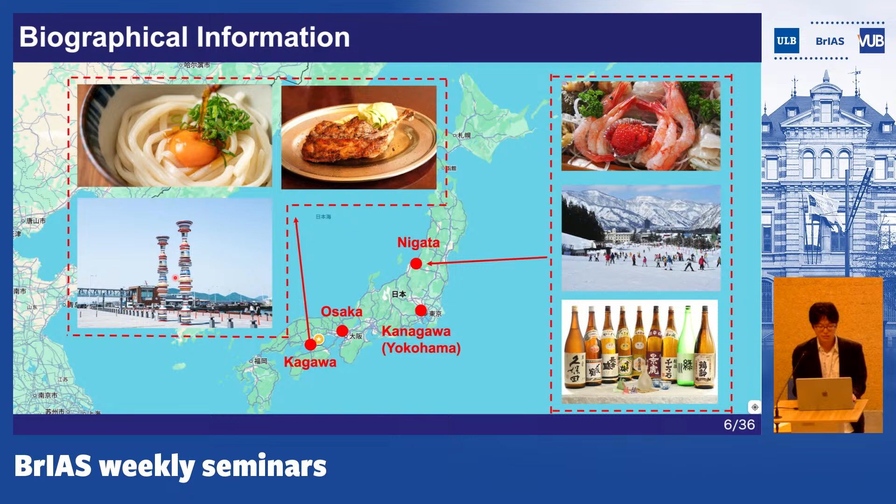Okay. Next, I'll talk about the research. First, the research motivation and research interest: how can we understand and utilize the mechanism of tactile sense. We usually use tactile sense, for example, to touch objects or search the environment, and recognize the environment or object. However, we don't totally understand the mechanism of tactile sense. For example, how tactile afferents, which are nerves to sense tactile sense, contribute to it, or how skin contributes to the sense. So I want to reveal these questions and apply the findings to the development of better devices.

For example, better tactile sensors, or better soft robots, or better tactile devices for virtual reality. Okay, next, I'll talk about the history, why I got such motivation.

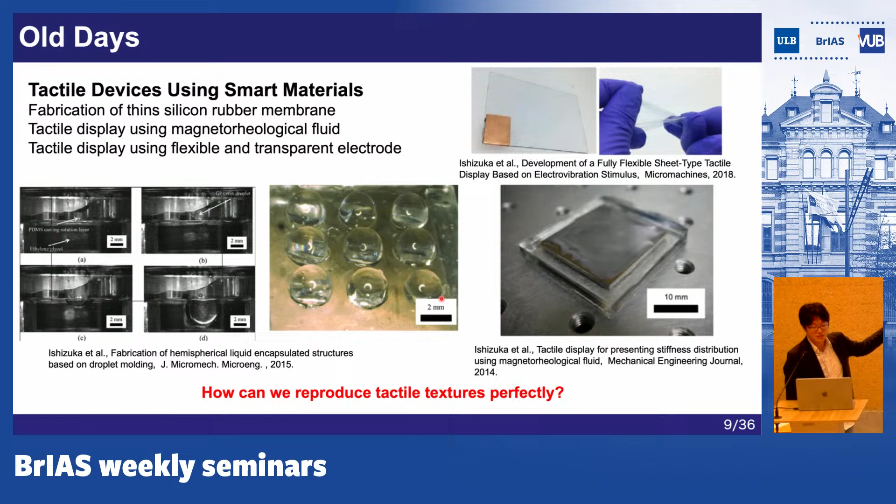Through these devices, I faced a problem. Even if I use these kinds of devices, it is impossible to reproduce tactile textures realistically, I mean, perfectly. To solve this problem, I found one way: the use of simulation. If we can simulate the activity of tactile afferents, it is possible to simulate how we feel texture, objects, force, or something.

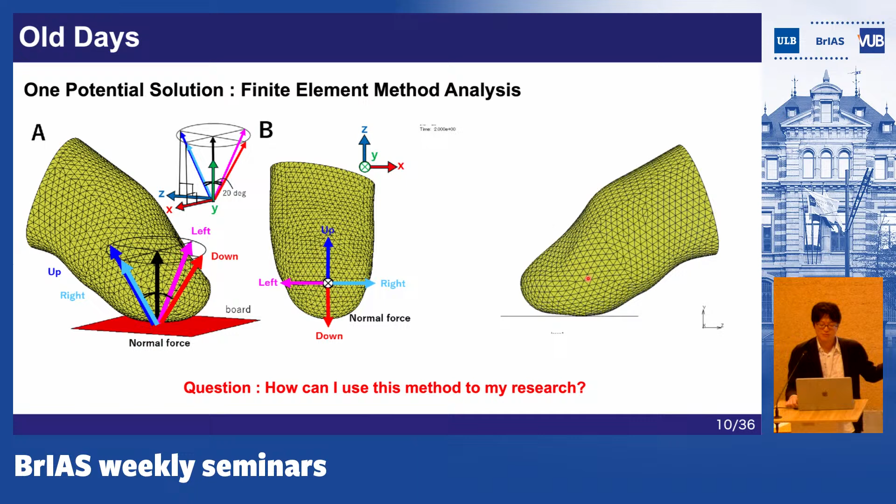This is an example of a simulation, called finite element method analysis. This method is famous; it divides the object into small elements and applies the deformation to the object. Then each element deforms, and as a result, we can get the entire deformation of the object. Then I faced another problem: how can I use this method in my research? I needed to find a way.

I considered a lot, and I found 3 ways. One way is, as I said, to use the simulation method to understand and simulate tactile sense on a computer. If I can get good findings from the simulation, it is possible to develop better devices using the findings or novel materials. Also, if I could prepare new devices, it is possible to develop applications such as virtual reality or remote operation.

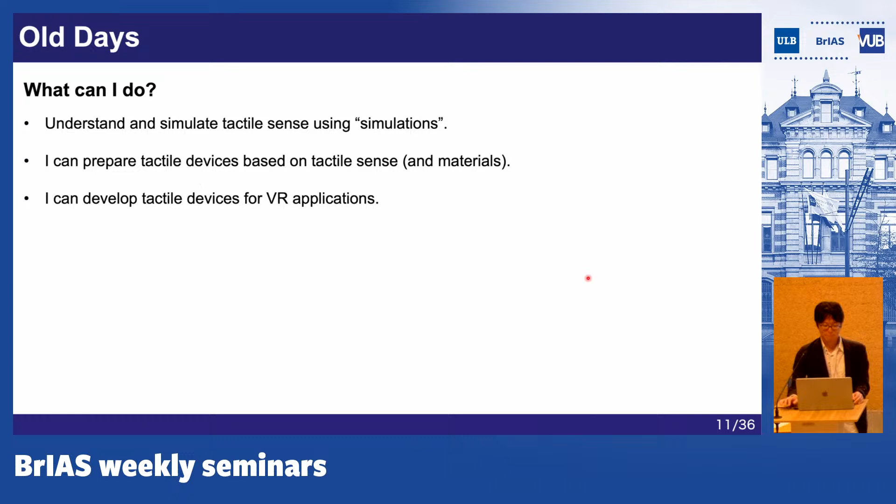From these 3 ways, I found one research direction: recording and presenting tactile sense. Recently, the metaverse, a kind of virtual reality technology, attracts interest from both researchers and industry, and it is said the market of the metaverse will be huge in the future. I believe the nature of the metaverse is presenting senses, such as tactile, visual, auditory, and so on. And I believe tactile sense is a powerful sense for virtual reality, because we touch objects to distinguish the object or environment, so we can feel reality through tactile sense.

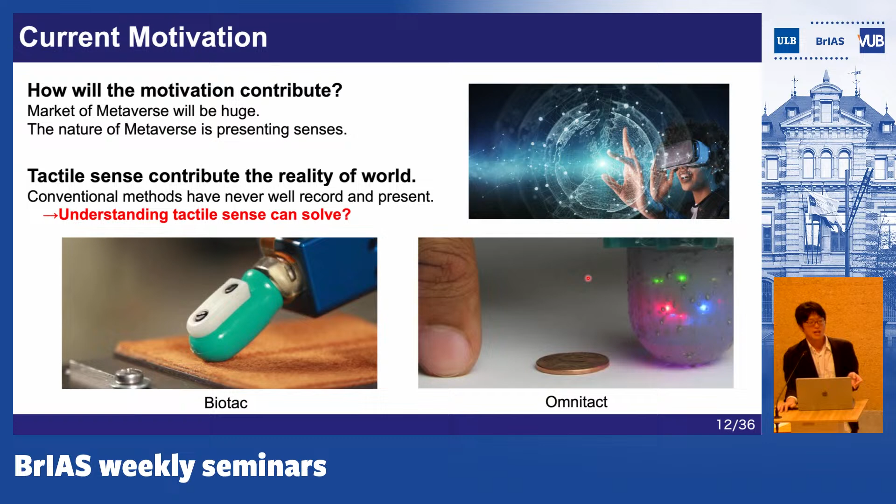But the problem is current devices cannot record or present tactile sense, as I said. And I thought that understanding and utilizing the tactile sense can solve this problem and will contribute to the development of better devices.

For this purpose, I conducted research on 3 topics. One is simulation and measurement. On this side, I simulate the skin and the tactile afferent nerves using a computer. To get a numerical model of the skin or nerve, I need to collect biological data, so I also conducted experiments. For example, I developed a haptic display that stimulates participants and gets brain data. And using these findings, I developed various sensors and actuators, for example, soft actuators or soft sensors.

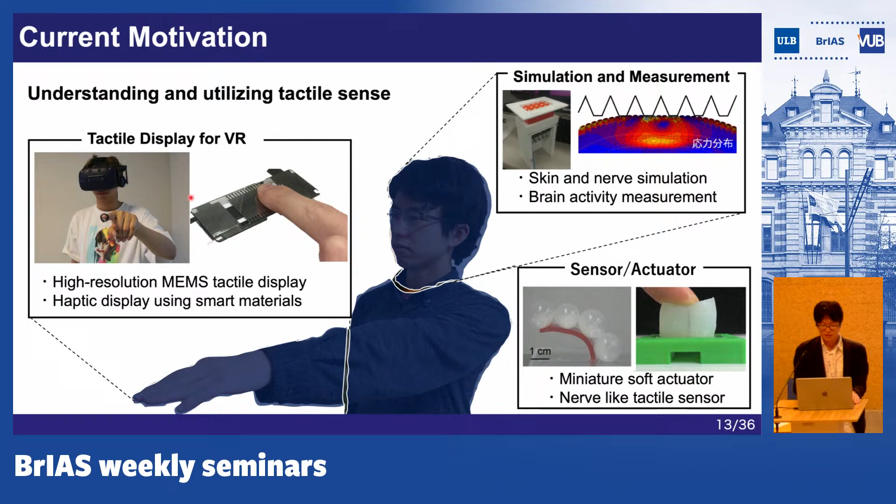Using findings of the simulation, the measurement, and the sensors and actuators, I also developed tactile displays for virtual reality or remote operation. For example, I developed a high-resolution tactile display using microfabrication technology, or a small force haptic device for virtual reality using low boiling point liquid. Okay, next, I'll talk about each topic.

First, I'll talk about the simulation and measurement. Inside our skin there are many tactile afferents, and there are many types of tactile afferents, for example FA1, SA1, SA2, and FA2. The name of the organ for FA1 is Meissner, SA1 is Merkel, SA2 is Ruffini, and FA2 is Pacinian. These tactile afferents encode tactile information, such as force direction, contacting shape, or texture.

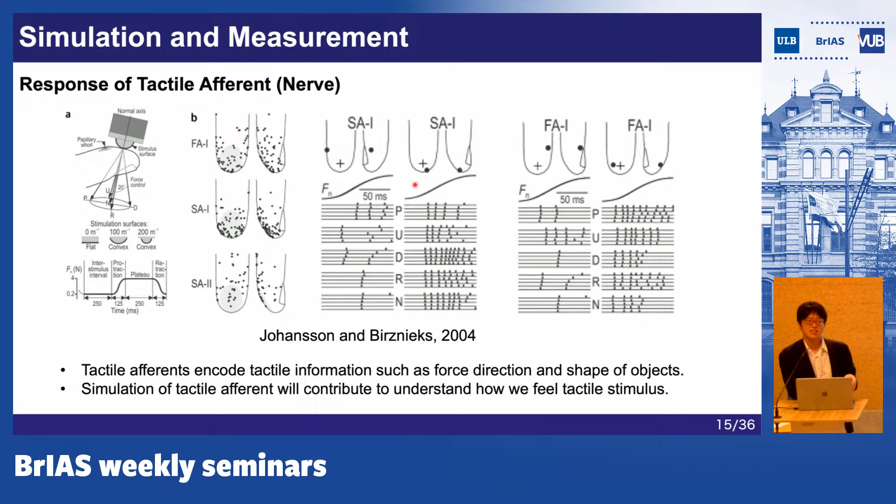So humans process this kind of information from tactile afferents and recognize tactile sense. So if we can simulate the activity of tactile afferents, it is possible to understand how we feel tactile sense, such as force, texture, or object. For this purpose, I constructed a model for the simulation. As I said, finite element method analysis is a powerful tool to simulate the activity of tactile afferents, I believed. So before the research, I investigated the related works.

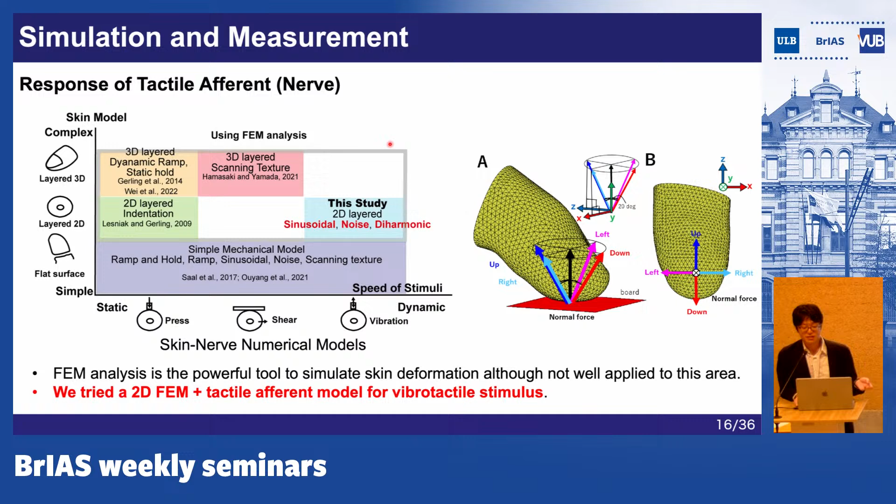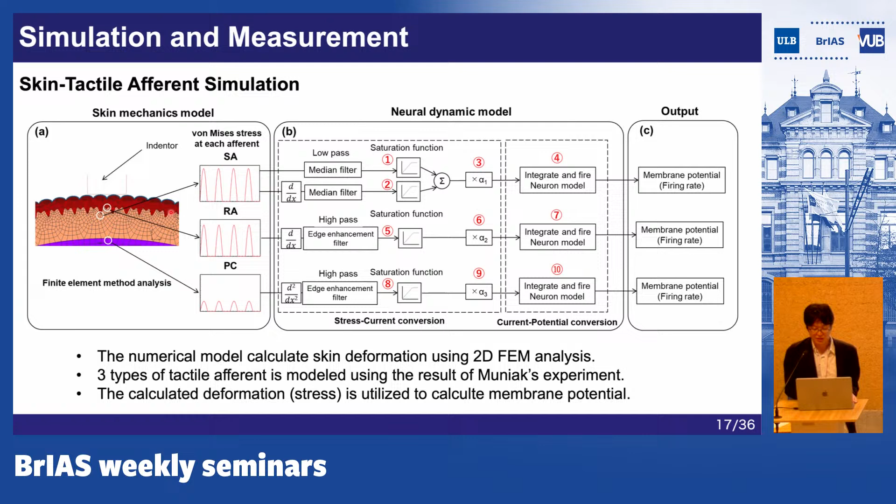Timing is important because when stimulus is applied to the tactile afferent, the membrane potential gradually increases, and at a certain voltage it suddenly increases. This information is sent to the following nerves and finally reaches the brain, and we recognize the tactile sense. So the timing of the firings is important for tactile recognition, and we evaluated this point.

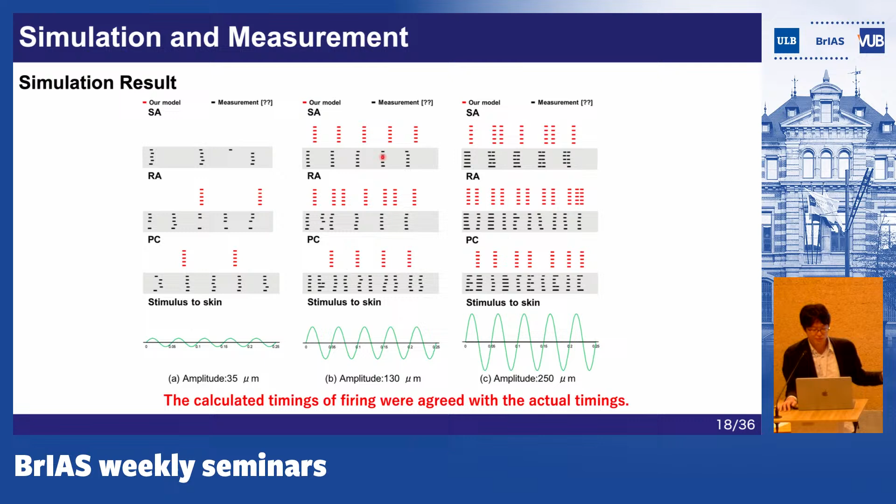Previously, we used a two-dimensional skin model, but currently we are trying to apply a three-dimensional skin model. We mimic the structure, shape and mechanical properties of skin in this model. In future, we will apply this model to simulate more complicated skin deformation, such as shear force or contact with texture or objects. Okay.

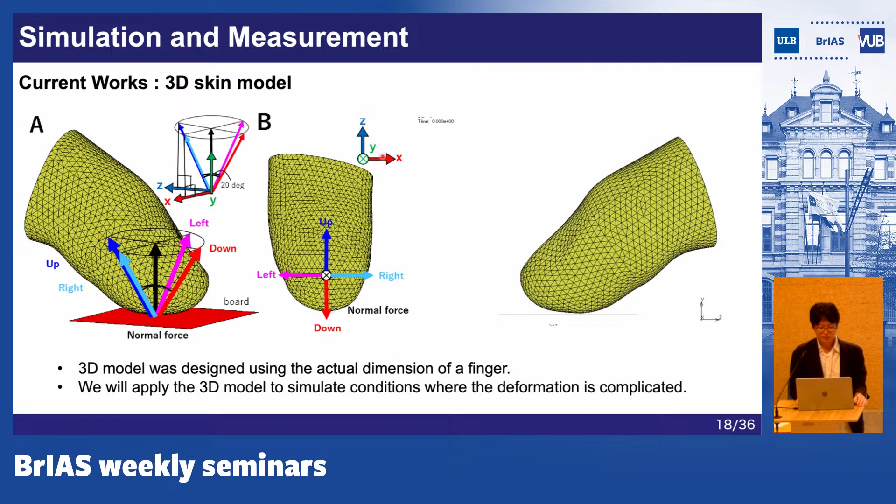As I said, to construct the numerical model, we need to collect biological data, so I also tried biological data collection. We hypothesized that tactile shape recognition and visual shape recognition are conducted in the same area of the brain. To investigate this, we conducted an experiment using functional MRI. In fMRI it is impossible to use magnetic materials, so I designed a new pneumatic actuator without magnetic material. The width of the actuator was maybe 1 centimeter, and I arranged 35 pneumatic actuators densely.

The array of actuators could present the shape information to users, to their palm. So we set this device inside the MRI, and we also placed the control system, including the pneumatic compressor and the valve system, outside of the room.

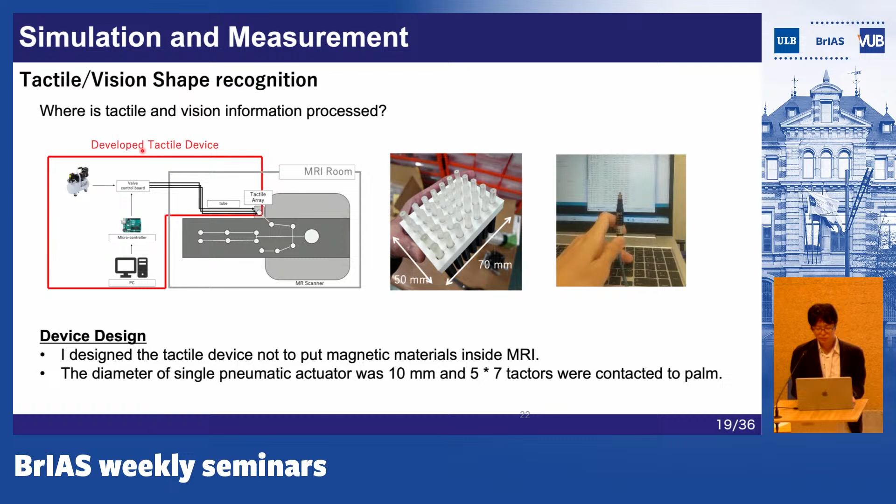Okay, we conducted the experiment with 6 participants. The number of participants was insufficient because this was a preliminary experiment. So in the experiment, we put the participants in the functional MRI, and we applied a magnetic field of 3 Tesla. In the experiment, we used numbers and characters as stimuli to the participants.

So the trial can be divided into 2 phases. One is the stimulus phase, and the other is the recognition and answer phase. So we used the numbers 0 to 9 and the characters A to L. We conducted 3 trials for each stimulus.

Hi. Okay. So are you actually stimulating in the shape of the digits and characters on the palm? Yes. Okay. And why did you choose this sort of passive touch on the palm as opposed to something more intuitive with active touch?

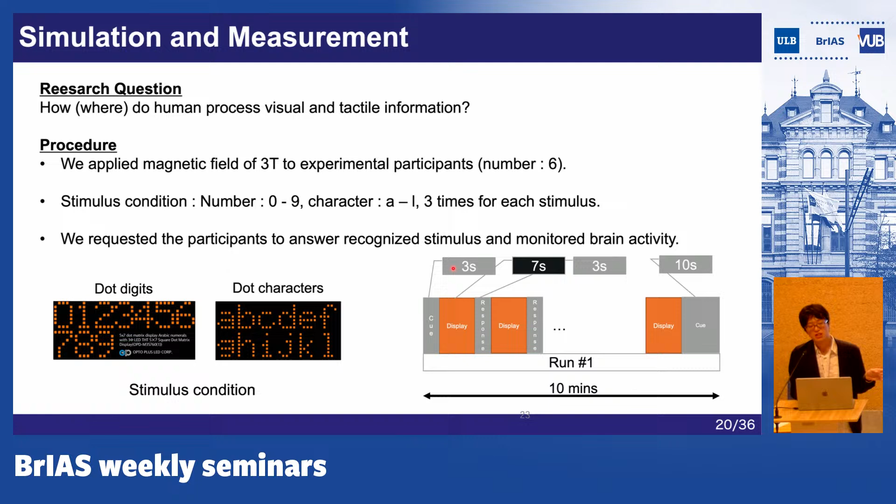On the other hand, during the recognition and answer phase, the back side of the brain was activated. These are the IPS and LOC. So from the result, it might be said that humans use the same brain area to recognize shape through the eye or skin. But as I said, the number of participants was insufficient. So we need to get data from more participants, and we need to generalize the result in the future.

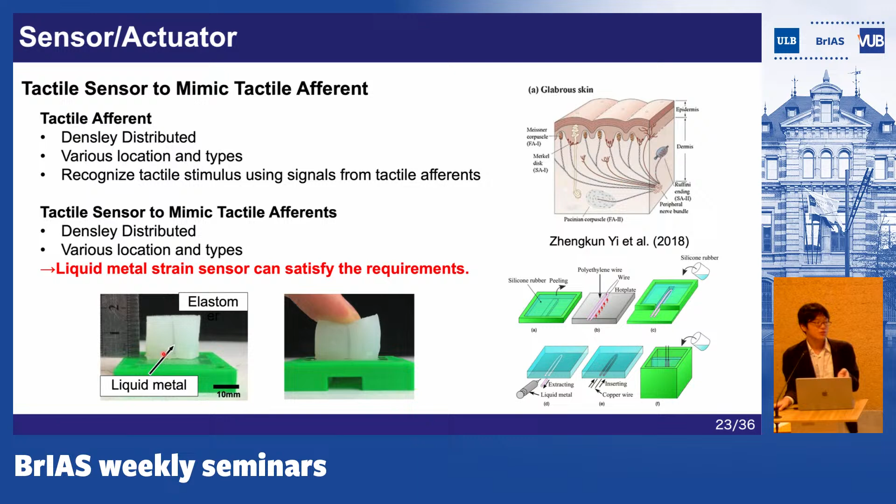To characterize the strain gauge, we conducted an experiment. In the experiment, we indented the sensor with an indenter with a contact area of 5 mm times 5 mm. The indentation speed was 1 millimeter per minute, and the indentation displacement was 1.7 millimeters. In the experiment, we tried various locations.

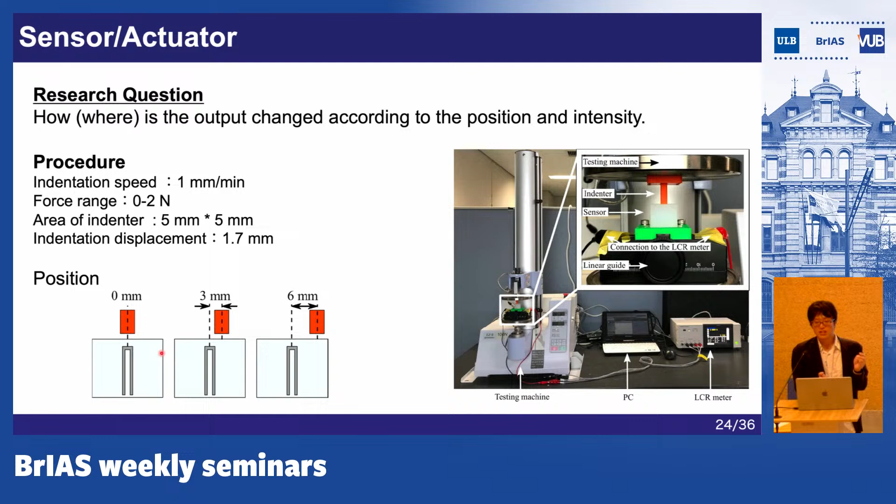This area, the top side of the strain gauge, was compressed, and the cross-sectional area was suddenly decreased. And this results in the quick increase in the resistance. Yeah, this shape was from the structure of the strain gauge.

And as the distance between the strain gauge and the indenter was increased, the sensitivity of the strain gauge was decreased. A similar trend is seen in our body. For example, when the distance between the indenter and the tactile afferent is increased, the sensitivity, the activity of the tactile afferent is decreased. So from this result, the sensor and the strain gauge have similar characteristics as those of the human skin and the tactile afferent.

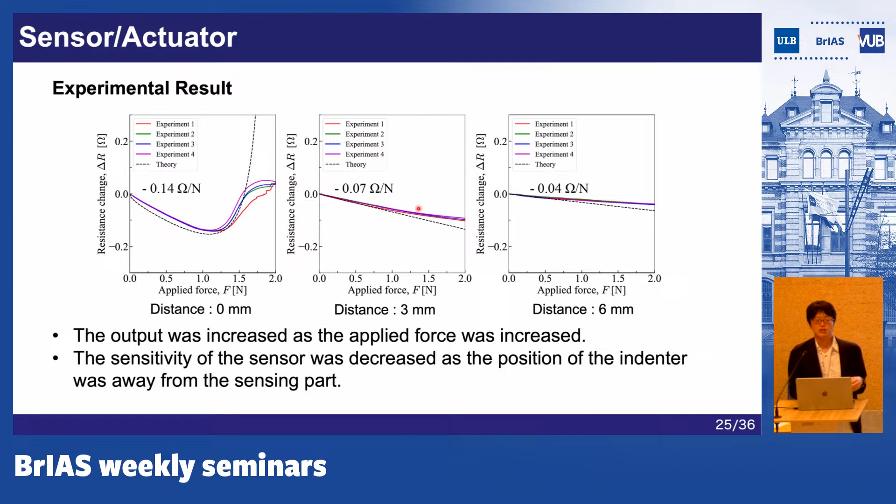In the future, we will densely array these small strain gauges inside the silicone rubber at various locations, and try to mimic the function of human skin. I also focused on an interesting characteristic of skin, healability. Here, we fabricated an optical waveguide type tactile sensor.

Usually, to make a tactile sensor, we try to make the soft material conductive by adding small conductive powders. But sometimes this causes problems. The performance of the conductive powder is usually unstable. To solve this problem, we focused on the principle of the optical waveguide. We put the diode and transistor and monitored light from the diode using the transistor.

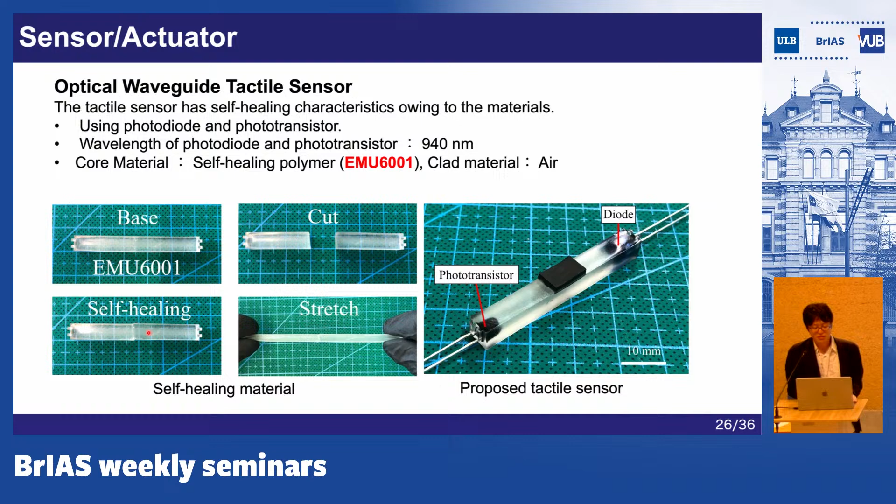The body was formed using self-healing polymer. When the polymer is cut, it is possible to heal it by connecting at room temperature. After the healing process, it is possible to stretch again. Okay. Here, I explain the principle of the optical waveguide. As I said, the transistor detects the light from the diode.

When force is applied to the sensor, the shape of the sensor is changed, and this causes the change in the incident angle of the light, and this results in the reduction of the reflected light here. In other words, more light passes through the interface between the sensor and air. And this results in the decrease in the light intensity here. So by monitoring the change in the light intensity here, it is possible to estimate the applied force.

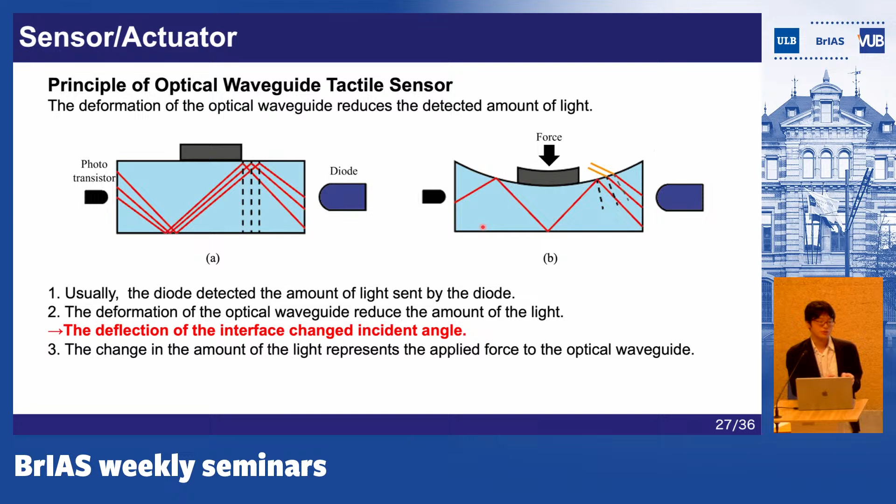We conducted an experiment to characterize the sensor. In the experiment, we indented the sensor and then monitored the output of the sensor. The speed of the indentation was 1 millimeter per second, and the displacement was 1.7 millimeters. After the indentation, we cut the sensor, damaged it, and then repaired it. Then we conducted the experiment again to evaluate the healability of the sensor.

This figure shows the experimental result. The vertical axis shows the change in the output, and the horizontal axis shows the applied force. The output of the sensor was decreased as the applied force was increased. The result agreed well with the theory I explained. Also, we tried simulation using finite element method analysis, and we observed a similar trend. But we need to compare the simulation results and the actual results. Currently, we are working on the comparison.

And the color means the difference in the timing. Blue means before repair, and red means after repair. The sensor output was slightly changed. This was because the sensor was not perfectly repaired. If we can perfectly repair it, the two lines should match.

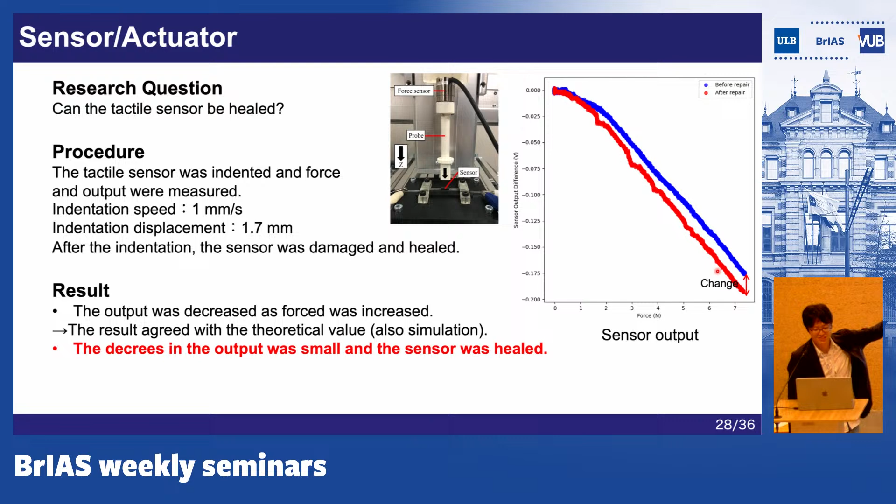Currently, I'm thinking about mixing the sensor and actuator. Last year, I developed a pneumatic actuator using a self-healing polymer. So I'm thinking about the integration of the sensor into the actuator. If we can integrate the sensor and the actuator, we can develop a perfectly healable soft robot. Currently, I'm thinking about it, but it is also my future work.

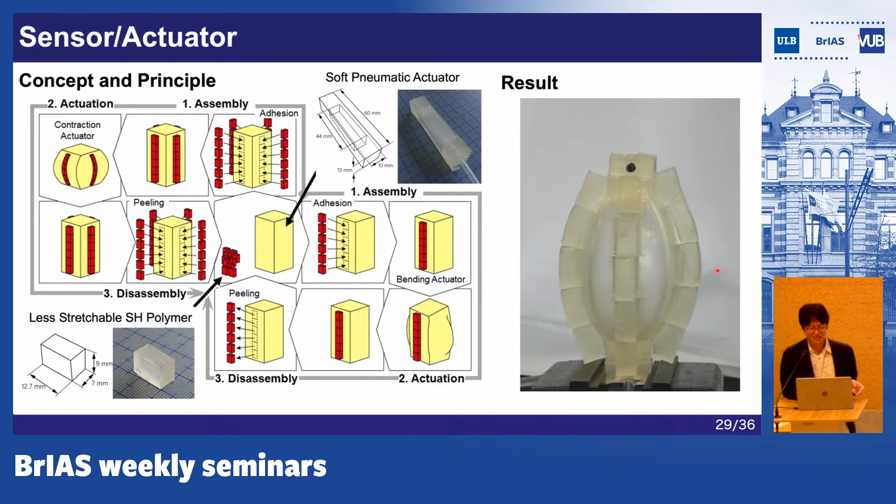Lastly, I'll talk about the tactile device technology. In virtual reality, pneumatic actuators are often used to present force sensation. But as you know, the pneumatic actuator requires a large system, including the pneumatic compressor and the pneumatic valves, and this makes the entire system bigger. To solve this problem, we focused on the low boiling point liquid, Novec 7000. This liquid evaporates at 34 degrees Celsius, so it boils at low temperature.

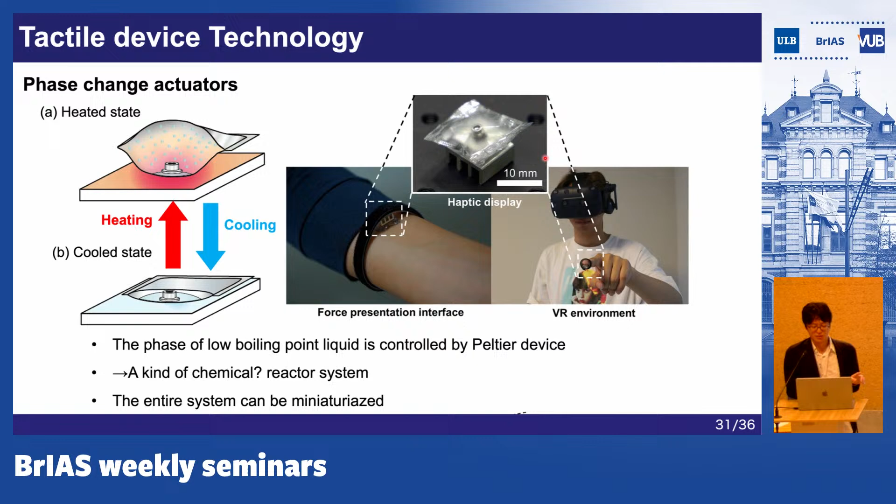We put the liquid in a plastic bag and heat and cool it using a Peltier device. When the liquid is heated and reaches a certain temperature, the liquid becomes a gas. Then pushing force is generated. By cooling, we can reduce the pushing force. The entire system is 1 centimeter by 1 centimeter, so very small. It is possible to put this system on the fingertip. This is the actual video.

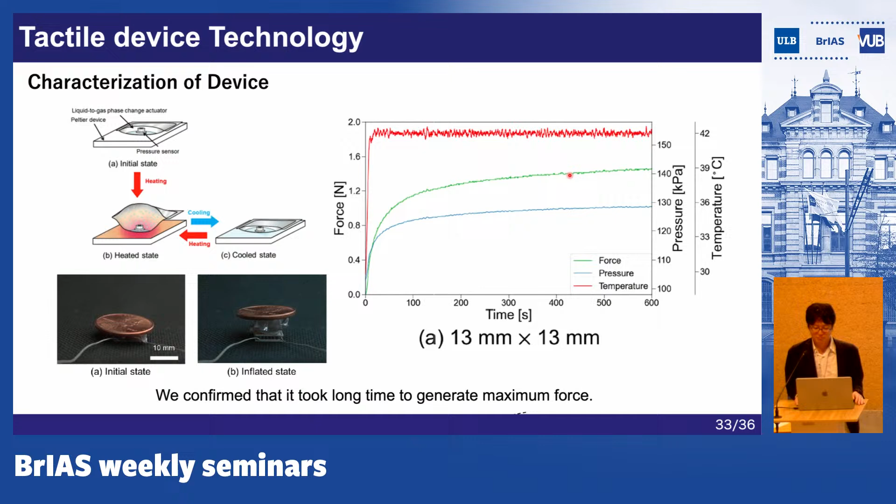We applied this device to the user interface. So we recruited 10 or more participants, and we conducted an experiment with them. We asked them to put their finger on the device, and we heated the device. And we asked them to answer the timing when they feel the force from the device. And this figure shows the result.

The vertical axis shows the pressure inside the device, and the horizontal axis shows the time when they feel the force. Interestingly, the participants can feel the force in about 2 seconds. So very, very much faster than I expected. The reason for the result is the sensitivity of the fingertip. The fingertip is a sensitive part of the body. Therefore, the participants could feel the small change in the force.

So if we can optimize the device structure or heating mechanism, I think it is possible to present the force in less than 1 second. And it is suitable for virtual reality applications, but that is also future work.

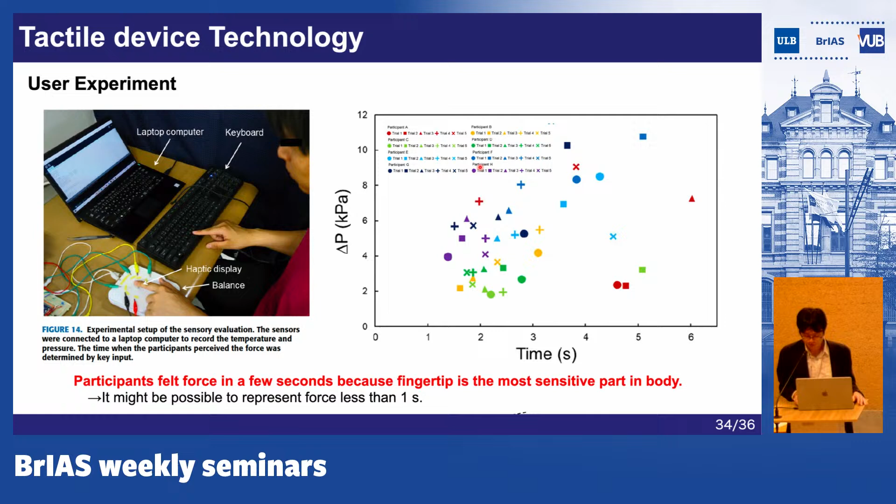Okay, last, I'll talk about the message. As I said, inside our skin, there are many tactile afferents, nerves, and from the signals from these tactile afferents, we can recognize tactile sense. Recently, an interesting result was published. Our actions cause unique skin deformation, and the skin deformation also causes a unique response pattern of tactile afferents. According to the pattern, we recognize what we are doing, like how we smile, or how we bend

our arm or something. So I want to apply these kinds of findings to the development of novel devices such as novel tactile sensors, novel soft robots or novel tactile devices. I have been thinking about this kind of topic for a long time, but I have never found a good idea to apply it. So if you have a good idea to apply these findings to devices, please try and show the application to the world.

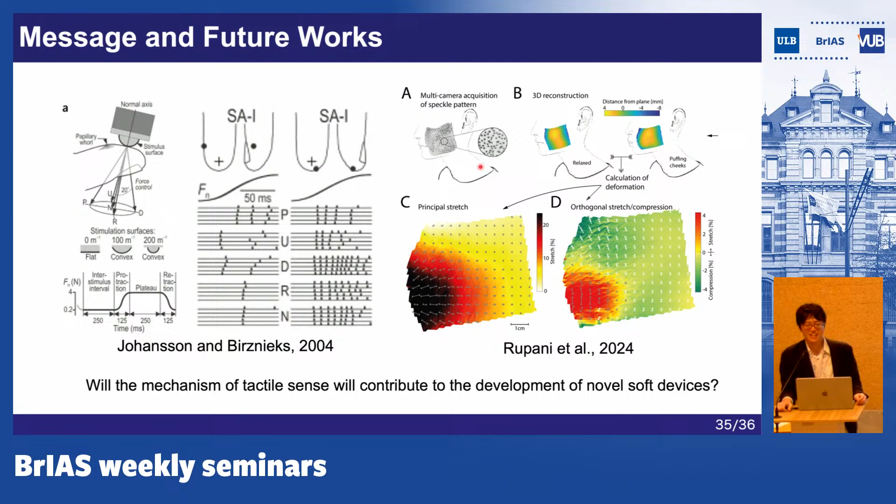This is a summary of my presentation. Thank you for your kind listening.

I think you already had questions. Thanks for the talk. My question was on the fMRI study in your first part. I was wondering, why did you choose to stimulate with passive touch on the palm as opposed to active touch? Yeah, I see. Thank you for your nice comments. Usually in this kind of research, we use a pin array type tactile device. So I checked the related studies and chose the design.

But as you said, it is possible to use an actuator like this. But in that case, the structure of the actuator might be more complicated, and to control the actuator, we may need to put more sensors inside it. Then we might require magnetic material to control the system, and in functional MRI, it is impossible to use magnetic material. So that might cause a problem. So I think your idea is nice, but if you want to use it, we need to consider the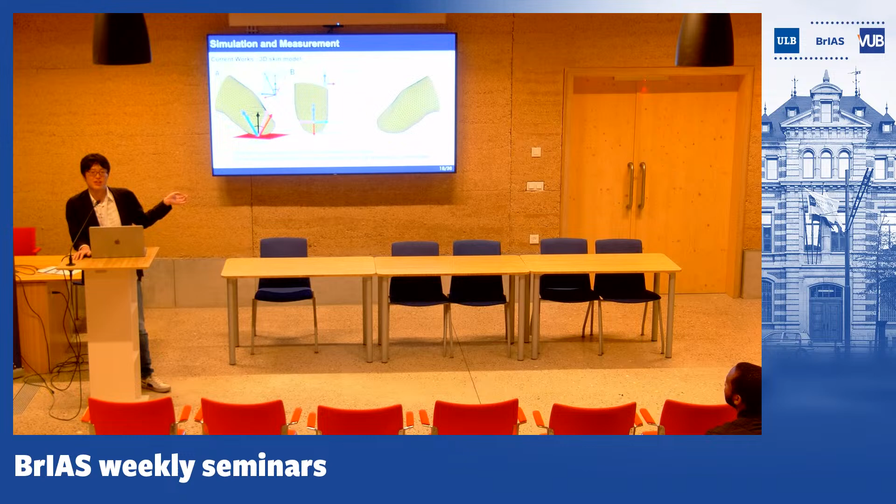So I refer to the data from the papers and evaluate the accuracy. For example, the result of the distributed tactile afferents was shown. So I'm thinking about the comparison between the simulation result and the data of this paper. Actually, to develop a better model, I need to collect more biological data, as I said. Thank you.

Thank you for the nice presentation. My question is about the area of application. I think you made mention of virtual reality as an application of the sensor. So is that what it is being designed for? Is that the only area of application for the tactile device? Sorry, as in, is it only for virtual reality applications?

No. I think the applications of tactile technology are many. For example, virtual reality is one application. And remote operation, training, or education; it is possible to apply tactile technology to various fields.

The reason why I'm asking is, when you consider prosthetic devices, especially the hand prosthesis, there are now works trying to bring how the human skin feels, trying to have the same structure on the prosthetic hands. Making reference to the previous colleague's question about the structure of the sensor, do you foresee that this design would have to be changed in order to be adaptable for prosthetic hands? Because the thickness of it is significant. How do you think this design can be applied there?